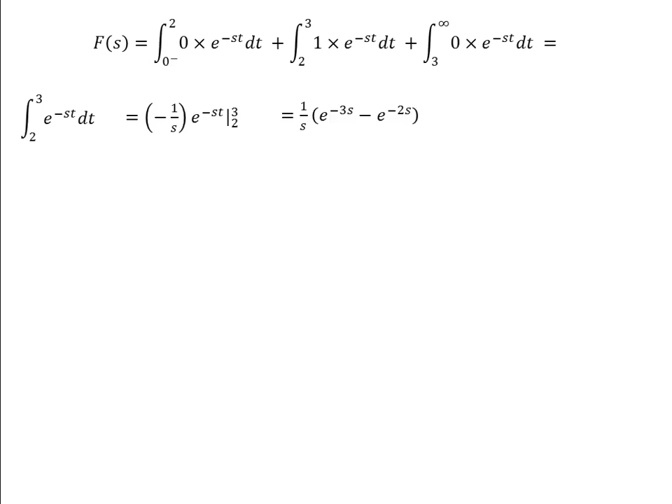So the integration of e^(-st) dt when t is varying from 2 to 3 will be minus 1 over s e^(-st). Substituting the initial and final values, we will have F(s) equal to 1 over s times (e^(-3s) minus e^(-2s)).

In part B of question 1, it's asking to prove that the Laplace of cosine omega t is equal to s over s squared plus omega squared. To prove this relation, we have two approaches. The first one is the definition of the Laplace transform. So using the definition, we know that the Laplace transform of cosine omega t is the integration from 0 to infinity of e^(-st) cosine omega t dt.

To solve this integration, I use integration by parts by defining functions u and v as e^(-st) and cosine omega t. I have the first part of the integration by parts as e^(-st) sine omega t over omega from 0 to infinity, minus the integration of minus s e^(-st) sine omega t over omega dt. If I substitute the initial and final values for the first part, I see that the value of this part is 0.

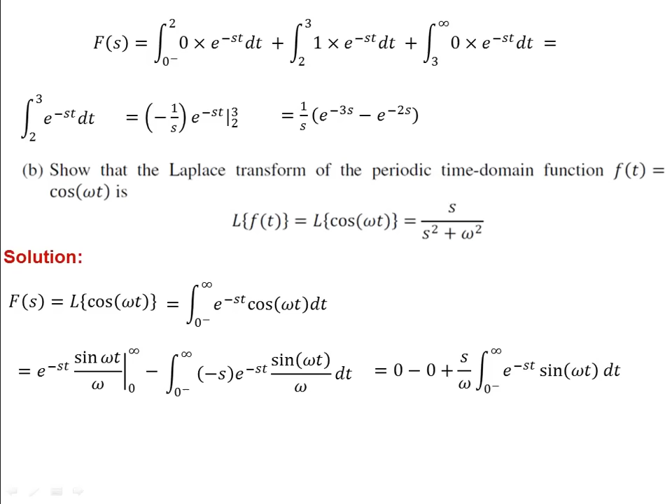So the remaining part will be the second integration. Since s and omega are constant, I can take out s and omega. The minus will be cancelled out with this minus. So I have s over omega times the integration from 0 to infinity of e^(-st) sine omega t dt. Again, I need to further solve this integration by integration by parts.

So if I use the same approach, I will have this integration equal to s over omega times e^(-st) times minus cosine omega t over omega from 0 to infinity, minus the integration from 0 to infinity of minus s e^(-st) multiplied by minus cosine omega t over omega dt. If I substitute 0 and infinity in this function, I will have s over omega multiplied by 0 minus 1 over omega.

In fact, for cosine omega t, this function when t is infinity is 0, and when t is 0 is 1, giving minus 1 over omega. And if you look at this integral and compare it with the first integral we have, we see that this integral is equal to minus s over omega F(s).

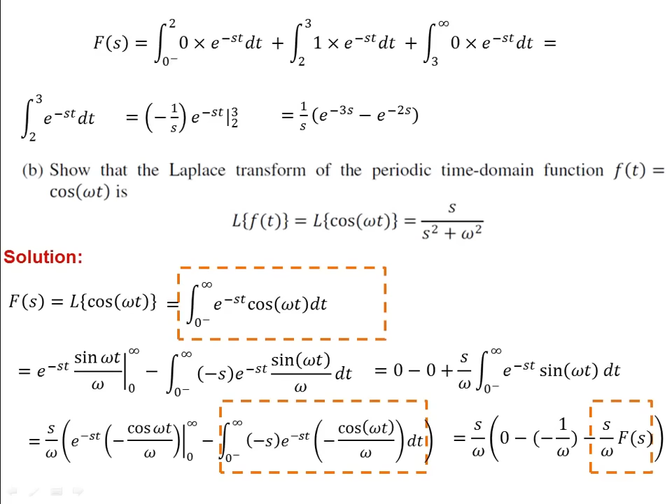So by considering this relation and considering that F(s), which is the Laplace of cosine omega t, is equal to s over omega times 0 plus 1 over omega minus s over omega F(s), I have F(s) equal to s over omega squared minus s squared over omega squared F(s). If I bring this F(s) to the left hand side of the relation, I will have 1 plus s squared over omega squared multiplied by F(s) is equal to s over omega squared.

If I get the common denominator for these fractions, I will have F(s) equal to s over s squared plus omega squared, which shows that the Laplace of cosine omega t is equal to s over s squared plus omega squared.

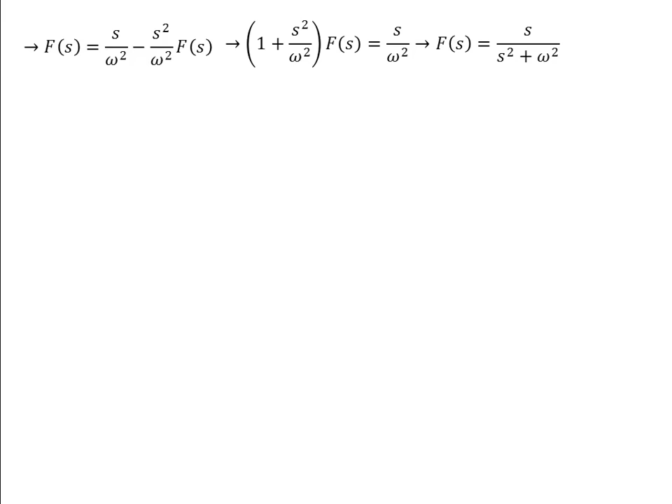For the alternative method, I use the theorem of the transform of derivatives. It says that the Laplace of the second order derivative of function f is equal to s squared F(s) minus s f(0) minus f'(0). So if my function f(t) is equal to cosine omega t, and if I assume that t is equal to 0, then f(0) is equal to 1.

The first derivative of f(t) is df(t)/dt, which is equal to minus omega sine omega t. If I substitute the initial condition again, I will have f'(0) equal to 0. So the second derivative of f(t) is equal to minus omega squared cosine omega t.

If I assume that the Laplace of f(t), which is the Laplace of cosine omega t, is equal to F(s), then by comparing, since minus omega squared is constant, the Laplace of the second derivative d squared f(t) over dt squared will be equal to minus omega squared F(s).

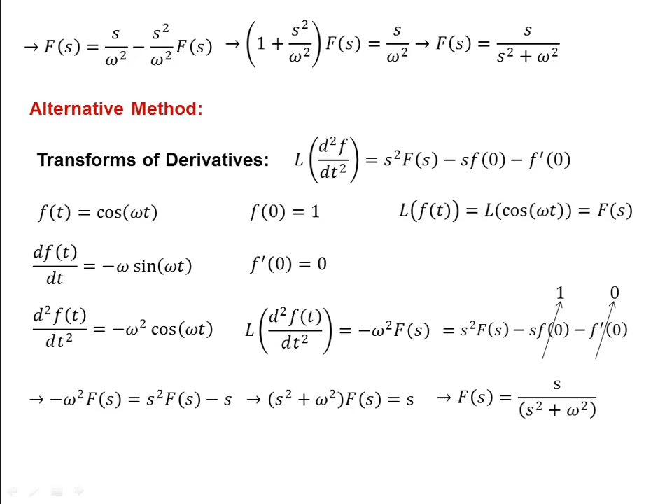If again I bring F(s) to the left hand side of the equation, I will have s squared plus omega squared times F(s) equal to s. Thus F(s) is equal to s over s squared plus omega squared, which is the end of proof of this relation.

In part C of question 1, we are looking for the solution of a given differential equation, which is dy(t)/dt plus 3y(t) equal to u(t), with the assumption that u(t) is a step function with amplitude of 2, and given initial condition y(0) equal to 1.

To solve this differential equation, again I use the transform of derivatives theorem, assuming that the Laplace of y(t) is Y(s). By this theorem, I know the Laplace of dy(t)/dt is sY(s) minus y(0). The initial condition y(0) is 1. And I know that the Laplace of the step function u(t) will be 2 over s.

So the Laplace transform of the whole differential equation will be sY(s) minus 1 plus 3Y(s) equal to 2 over s. If I reshape the relation and factor out Y(s), I will have (s plus 3) Y(s) equal to 1 plus 2 over s. So Y(s) is equal to 1 over s plus 3 plus 2 over s(s plus 3).

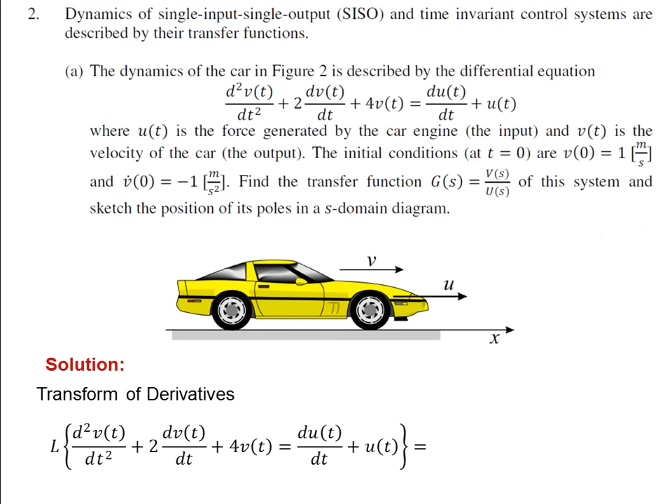The question says that the initial conditions are given, v(0) is 1 and v dot(0) is minus 1. We are looking for the transfer function G(s) equal to V(s) over U(s), and we need to sketch the position of its poles in the s domain. Again, to solve this differential equation, we need to use the transform of derivatives theorem.

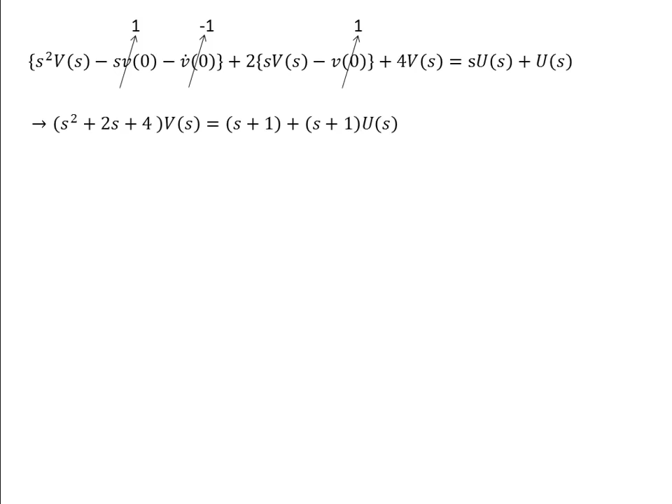After applying it, I have the Laplace of the differential equation as s squared V(s) minus s v(0) minus v dot(0) plus 2s V(s) minus v(0) plus 4 V(s) equal to s U(s) plus U(s). If I apply the initial conditions, I will have s squared plus 2s plus 4 multiplied by V(s) equal to s plus 1 plus (s plus 1) U(s). So again, V(s) is composed of two fractions, one due to the initial condition, another due to the external forces.

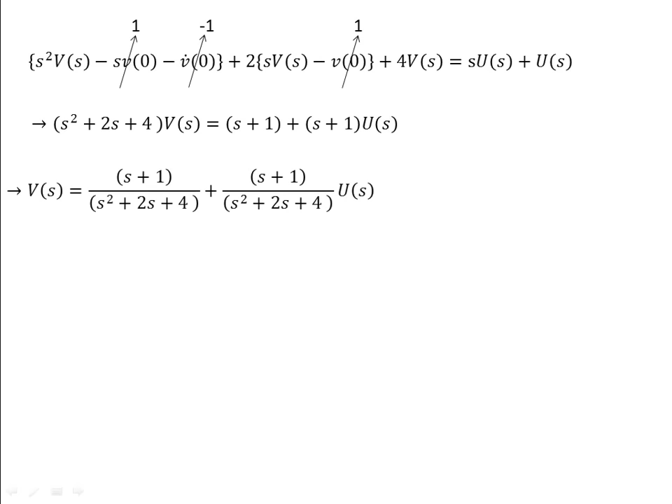But we are looking for the transfer function V(s) over U(s). The definition of the transfer function is the ratio between output over input when all initial conditions are 0. So we need to ignore the first fraction due to the free response. If I ignore this part, I will have G(s) equal to V(s) over U(s), which is equal to s plus 1 over s squared plus 2s plus 4.

In the second part, we are asked to sketch the location of the poles. The poles are the roots of the denominator or characteristic equation. We have two complex conjugate roots equal to minus 1 plus minus 1.7j. If we sketch the poles on the complex plane, because both poles are on the left hand side of the imaginary axis, the system is stable.

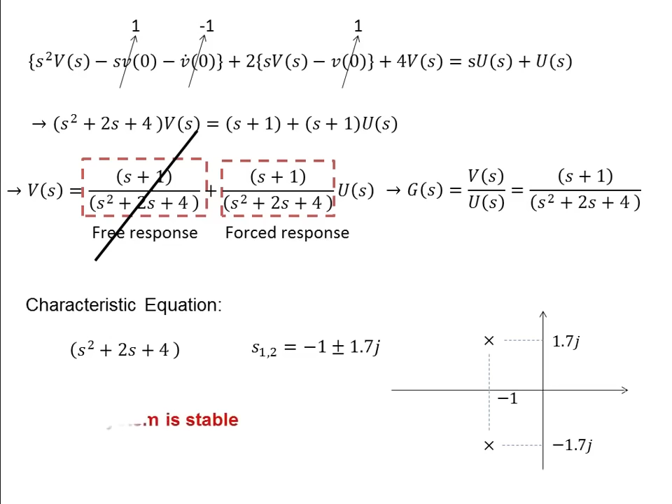For part B, we are looking for the simplified transfer function Y(s) over U(s). To simplify this block diagram, we first look at the feedback loop between G2(s) and G4(s). This is a positive feedback loop, so the equivalent transfer function will be G24 equal to G2 over 1 minus G2 G4.

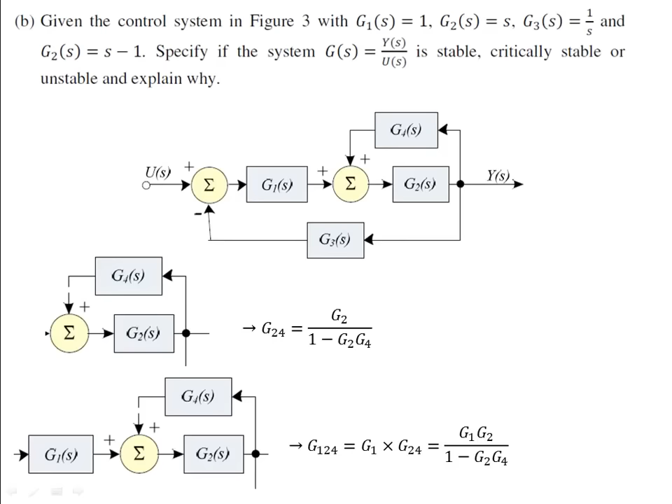If we substitute this positive feedback loop with this transfer function, we will have G1 and G24 in series. The equivalent transfer function of two series blocks is their multiplication. So G124 will be equal to G1 multiplied by G24, which is G1 G2 over 1 minus G2 G4. The resultant will be a negative feedback: in the feed forward path we have G124(s), and in the feedback we have G3(s).

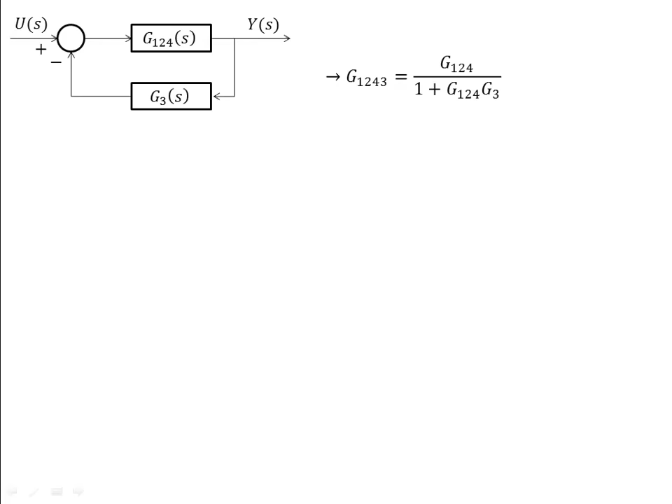Using the negative feedback loop equivalent function, we will have G1243 equal to G124 over 1 plus G124 G3. If we substitute G124 and G3 in this transfer function and further simplify this ratio, we will get G1 G2 over 1 minus G2 G4 plus G1 G2 G3.

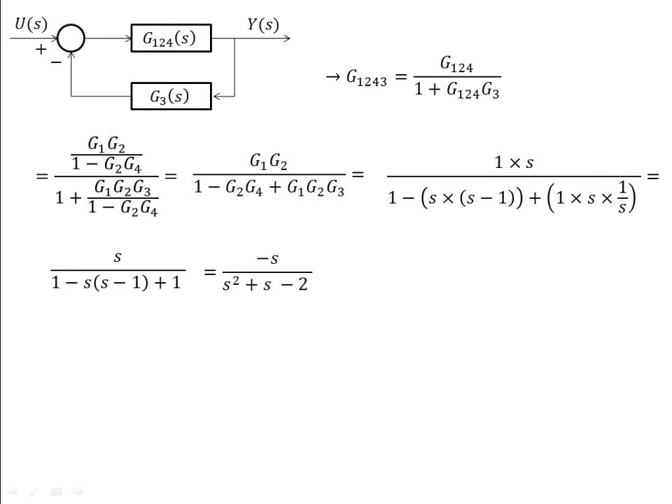If we substitute the given transfer functions for G1, G2, G3 and G4, we will have 1 multiplied by s over 1 minus s multiplied by (s minus 1) plus 1 multiplied by s multiplied by 1 over s. This s cancels with this s, so this parenthesis will be 1, plus 1, I have 2. So the equivalent ratio will be s over 1 minus s(s minus 1) plus 1. The final simplified transfer function is minus s over s squared plus s minus 2.

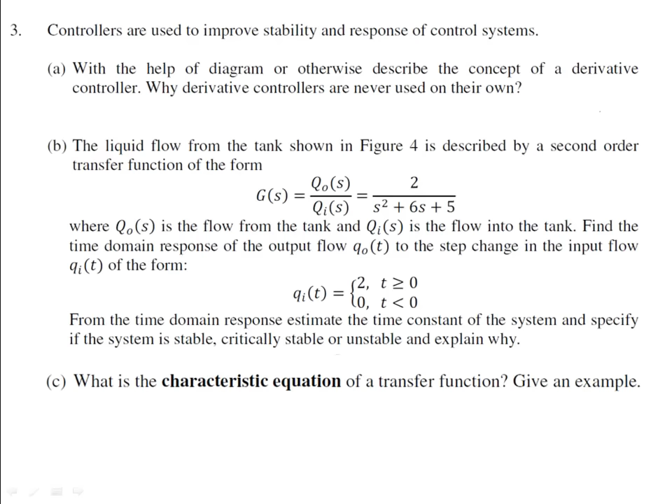In question 3, it asks to explain why derivative controllers are never used on their own. A transfer function of a system is also given, and it asks to find and sketch the time response for this given input function, and find the characteristic equation of the system. For the first part, the derivative controller is always used in conjunction with a proportional or integral controller to increase the damping, and it generally improves the stability of the system.

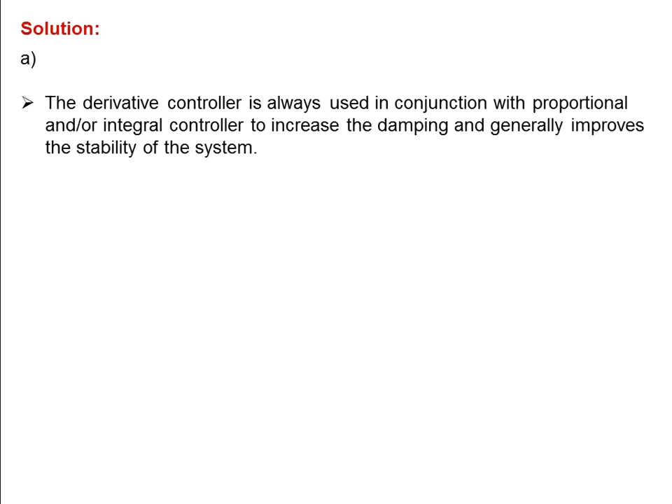So the reason we use a derivative controller in our system is to improve the stability of the system and improve the response of the system, because derivative controllers increase the speed of the response. However, they have two main issues that hinder their implementation in real applications, or the use of just derivative controllers.

The first one is that if in practice we apply the pure derivative controller, if the output or the error is constant, the output will always be 0, and the controller doesn't do anything. Another problem with the derivative controller is its effect on disturbance amplification. Actually, derivative controllers amplify the errors or the disturbances, specifically if they include higher frequency components.

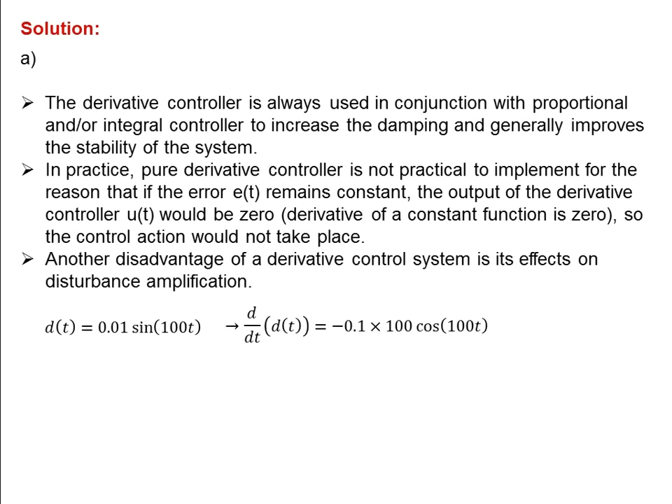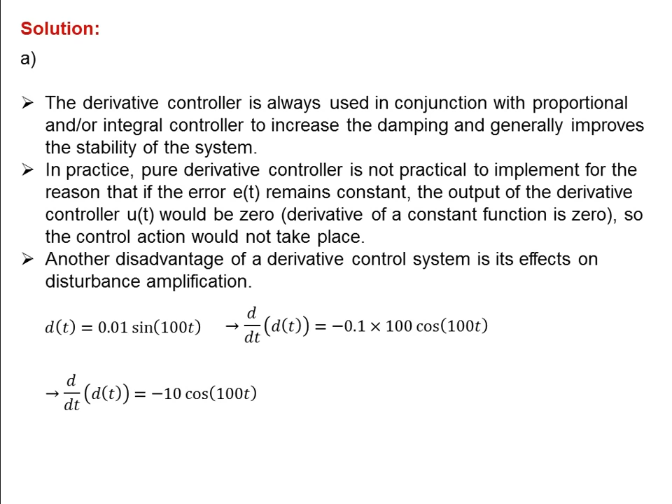For example, look at this function. Assume I have this disturbance or signal equal to 0.01 sin(100t). If I take the derivative of this signal, I will have minus 0.1 multiplied by 100 cos(100t). If I do this amplification, you see I have minus 10 cos(100t), which is much bigger than the amplitude given here. So this is the reason we can't use derivative controllers on their own, because they magnify the amplitude of the disturbance signals.

So for the second part, or part B, G(s) is equal to Q0 over Qi, which is 2 over s squared plus 6s plus 5. If I apply Qi(s) as 2 over s, I will have Q0(s) equal to 4 over s(s squared plus 6s plus 5). If I find the roots of this second order polynomial, I see I have two simple roots, one s equal to minus 1 and another one s equal to minus 5.

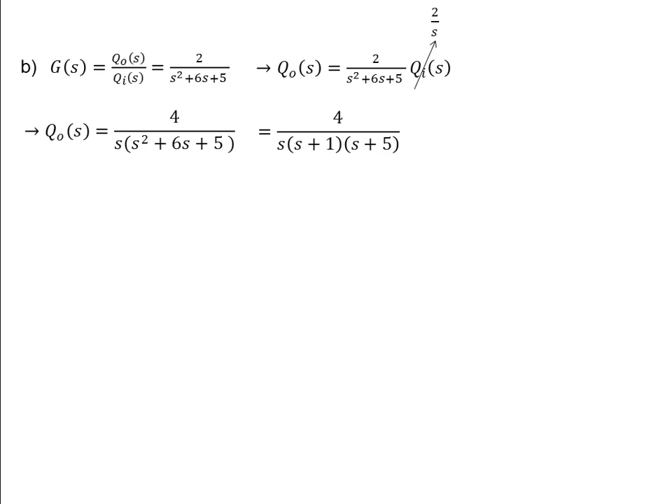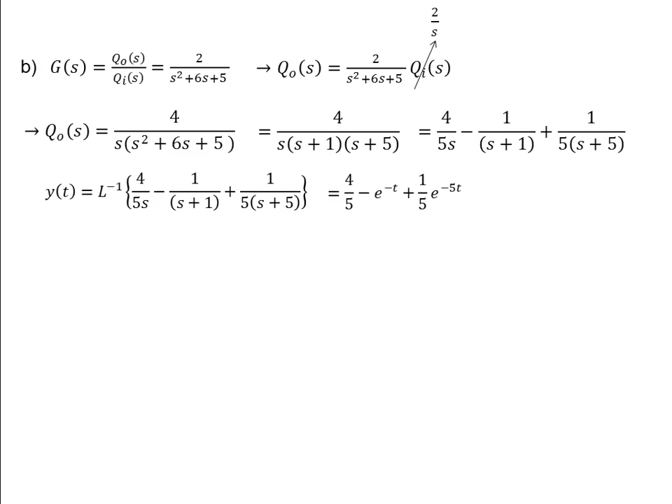To find the time response of this Laplace function, I need to use partial fractions. Applying partial fractions, I will have three components: 4 over 5s minus 1 over (s plus 1) plus 1 over 5(s plus 5). If I take the inverse Laplace of these fractions, I will have y(t) equal to 4/5 minus e^(-t) plus 1/5 e^(-5t).

If I sketch the response by hand or by computer, the response will be in this shape. As you see, the response looks like a first order system. To get a rough estimate of the time constant, I need to find the slope and the points at which this slope crosses the final value and the time axis. As you see here, the time between these 2 points will be tau, or the time constant, which is almost equal to 1.8 seconds.

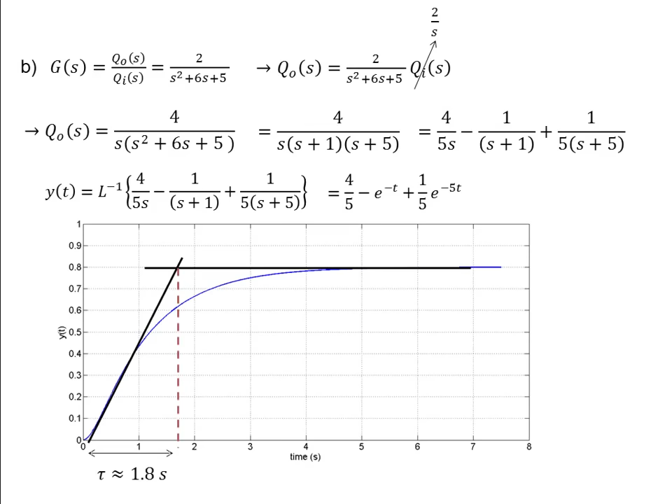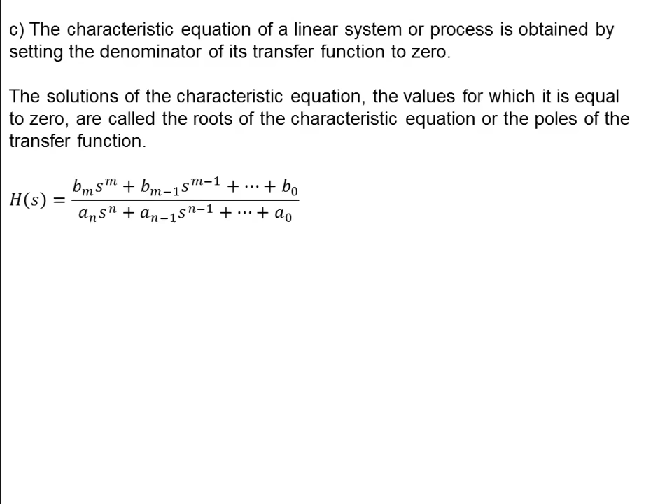For part C, the question asks about the definition of the characteristic equation. Actually, the characteristic equation of a linear system or process is obtained by setting the denominator of its transfer function to 0. The solutions of the characteristic equation are called the roots of the characteristic equation, or the poles of the transfer function. So assume that I have this general form of transfer function. The characteristic equation is the polynomial of the denominator. If I set this equal to 0, I will find the roots, or the poles of the system.

For our case, I have transfer function 2 over s squared plus 6s plus 5. So the characteristic equation is s squared plus 6s plus 5. We already found the roots of this one, which are -1 and -5. So the poles are -1 and -5, and the system is stable because we have two simple roots left of the imaginary axis.

But if you look at this transfer function, we have another definition. The roots of the numerator are called the zeros of the system. The zeros of the system don't affect the stability of the system at all. Their only effect is on the shape of the response. Again, the roots of the denominator are called poles, and the roots of the numerator are called zeros. Poles are important in investigating the response and the stability of the system. The zeros don't affect the stability of the system, but they can somehow affect the shape of the response.